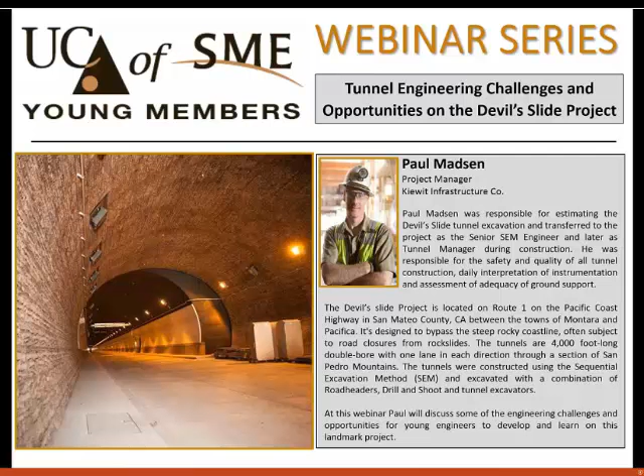Paul has over 25 years of experience as an engineer, superintendent, and manager for estimating, planning, and executing EPBM and NATM tunnels in soft ground and rock throughout North America for Kiewit. Paul was responsible for estimating the Devil's Slide tunnel excavation and transferred to the project as the Senior SEM Engineer and later as tunnel manager during construction. He was responsible for the safety and quality of all tunnel construction, daily interpretation of instrumentation, and assessment of adequacy of ground support.

Paul, thank you very much for presenting to us today, and when you're ready, you can please share your screen. All right. Here we go. So now all of you should see a beautiful slide of the Pacific Coast Highway. I'm very happy to be here and have this opportunity to talk to the future of our industry here today. And I have found out, however, there are some people who are over the legal age for attending a Young Engineers WebEx. So I'm also talking to the past of the industry, which is just a great privilege. So I hope you're all having a good hump day here. Wednesday, it's all downhill from here.

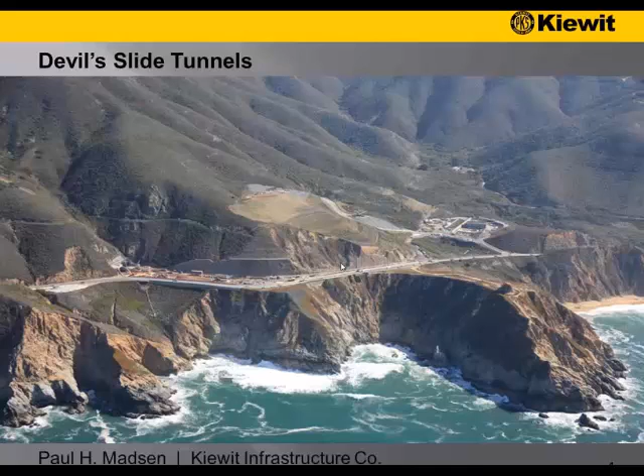So this was our construction site on the Devil's Slide project, and it's a beautiful location there in California. The south portal of the project is what we see here. Here are just some facts, and I'm not going to dwell on these too much, but what I want to point out on this slide is the purpose of this project. The purpose was to bypass this section of Highway 1. It looks similar to the previous slide, but it's just north of the previous location, right where the road runs along the steep edge and the cliffs. This is where Highway 1 has occasionally slid into the ocean over the years, and the project was to bypass this section.

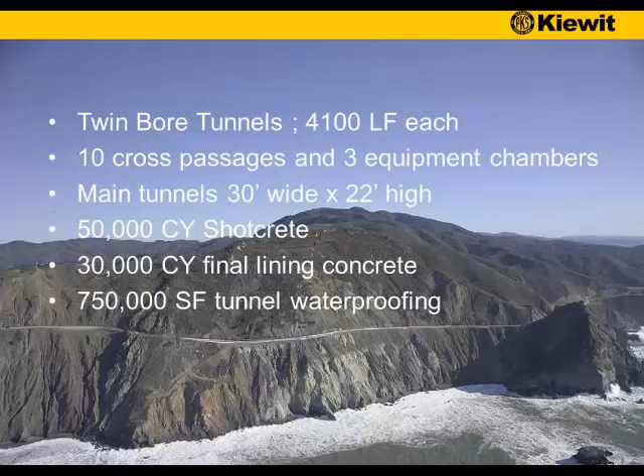Another thing to point out was the amount of shotcrete on this project, with 50,000 cubic yards of fiber reinforced shotcrete. That's a large amount, and I think it's one of the projects in North America with the most shotcrete on it. I know this is a bit of a tacky old slide, but it does serve the purpose of pointing out the features of the project.

The alignment of the tunnel, as you can see, is a straight line. It's two bores, 30-foot diameter each, with 10 cross passages along the way, and it runs from the upper left-hand side of the slide down to the lower right-hand side where the south portal is located. Part of our project was also this operations and maintenance center, which is located a little south of the project.

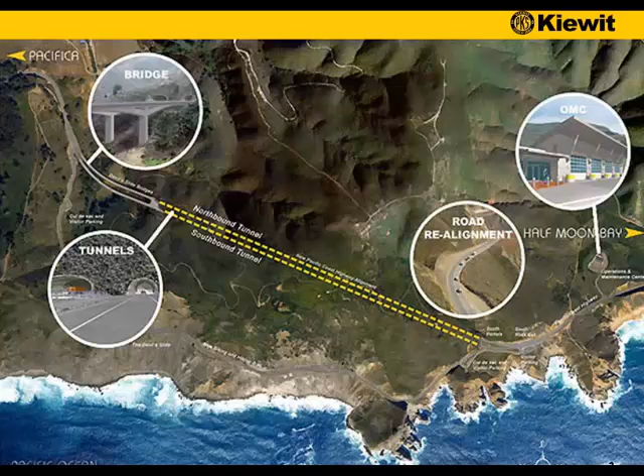Now here, one of my pet peeves, I'll start with that, which was geology on the job. This project ran through 3 major formations: a granodiorite, sandstone, and then a siltstone in the north end. As an engineer, when we first start looking at this, this is what you dig your teeth into, to understand as much of the geology as is available to you. And you can see we have some interesting features on this project.

You have a relatively high overburden for North America, I should say. If you're mining in the Alps, this is nothing, but for us to have 1,000 feet of rock over us is quite a bit. We see there are some fault zones between the main geological features, which could create some challenges in excavating the tunnel. The north block was completely jointed and fractured, almost soil-like conditions, whereas in the central block we had some very hard rock.

And another interesting thing here, if you look at it from a hydrological standpoint, if you see the blue lines, the water tables, how they're staggered across the alignment, and you see how when we mine from the south going to the north, we will go through a fault zone where there will be an instantaneous increase in the waterhead.

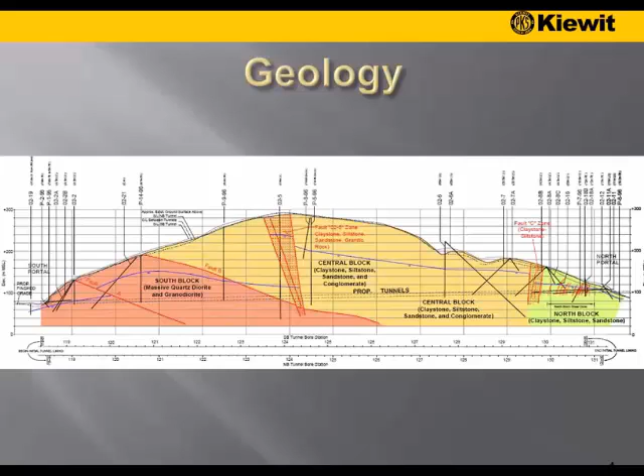Now the way we excavated and supported this tunnel was by the use of the sequential excavation method. It's a tunneling approach that has many names around the world. You'll hear it called the New Austrian tunneling method, mostly in Europe, especially in Central Europe, continental Europe. SEM, that's what we call it here in North America. Sprayed concrete lining, that's what the Brits typically call it. And there are several other names you will see it referred to as when you read literature from around the world.

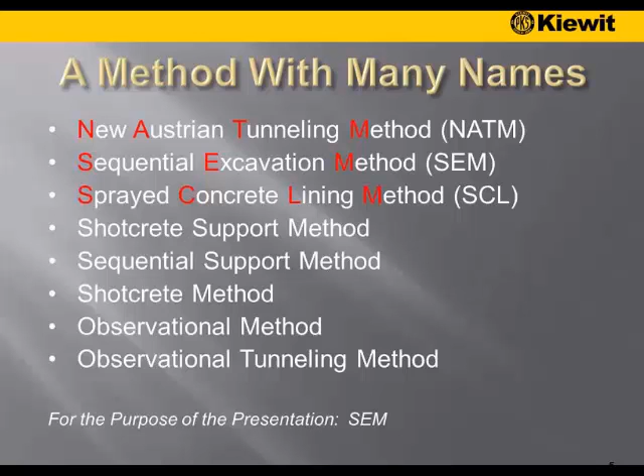One I personally like the best is really the observational method, and we'll get right into that here. But for the purpose of the presentation, I'll call it SEM. The reason why I like the observational method is the SEM process is all predicated on the ground support being selected to work with different ground conditions. You're taking advantage of the strength of the ground that you're excavating through to support itself.

Many of you will have probably seen pictures or movies from old tunnels where you see big heavy timber and steel support that were designed to carry like half a mountain above it. In those days, the engineers really designed that support to carry the dead weight of the rock above the tunnel. But the SEM is a lot more economical, because in that process we just help the ground support itself.

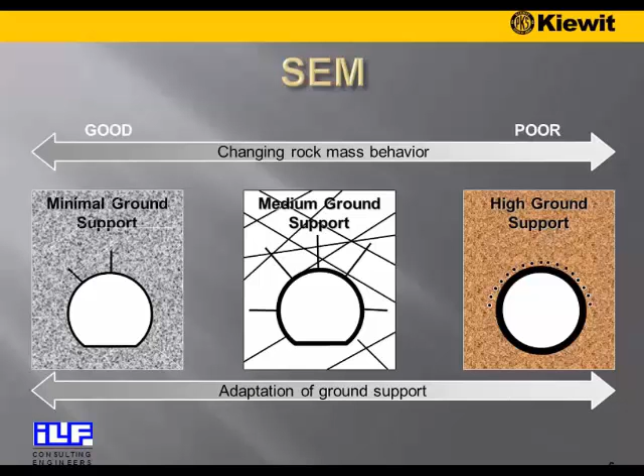And on the Devil's Slide project we had 5 major ground support types, and I'm not going to get into any details on these. I just want to show you guys what a typical tunnel ground support looks like. Here this is for the good rock. You can see the tunnel has a flat bottom. We're not relying on any kind of ring closure. It's got fiber reinforced shotcrete, just 100 millimeters, and then some rock dowels.

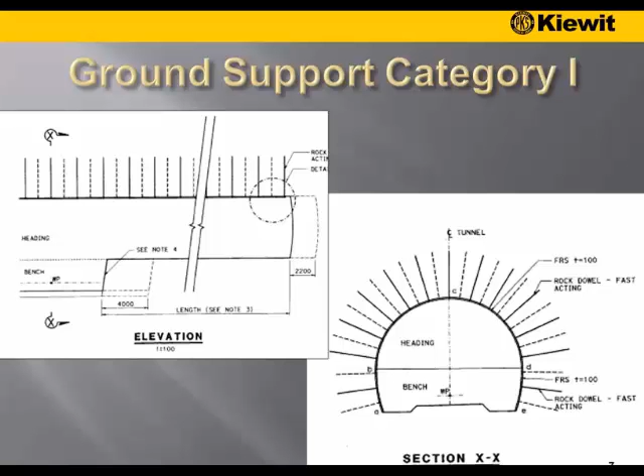And then as we go through these categories, see how we get more stuff showing up on these drawings. It gets completely crazy here when we get to category 5, which is what we used actually in the north end of the job in the normal soil-like conditions. Here you have a closed invert, you have a closed ring, you have 300 millimeters of shotcrete, all kinds of bolts and spiles and canopy pipes and face dowels. You'll also notice that the excavation round length is here just only 1 meter per round.

But this thing here starts all the way in the estimating stage, and we will sit with a whole group of us, including many young engineers, and we'll have to analyze these different ground support types and take off the quantities. So if you're a young engineer with a contractor and you're in the office, this could be one of the things that you get confronted with, that you get this slapped on your table, and somebody goes, here, now I want you to take off all these quantities. So you have to take off the different types of rock bolts, the shotcrete, the excavation volumes for the different excavation lifts for each round, so that you later on can do cycle analysis for the excavation.

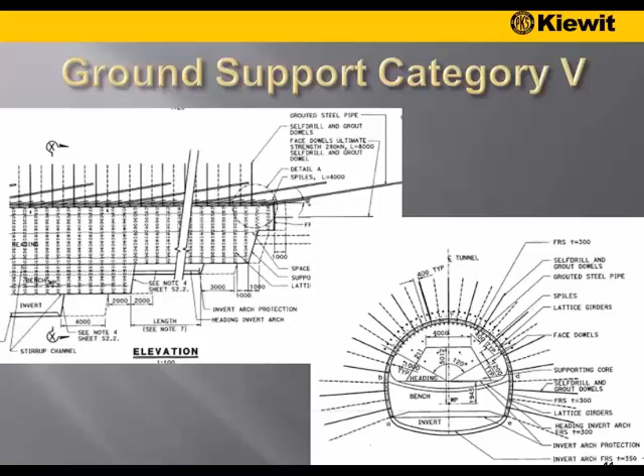So now that we've got the job and we're out there building it and everybody is excited, we have to select what ground type to use. This here looks like a crazy octopus, but it's how do we decide what ground support type to put in? Well, we gather information through doing probe drilling, collecting groundwater data, mapping the rock, everything that we see in here, MPBX, that's multiple point borehole extensometers. So here our engineering staff will get involved in collecting all this. We will have engineers collecting information from probe drilling.

We'll do the laser scanning, which was a new technology at the time when we did this project. And once we gather all this information, the convergence survey, we will have engineers analyzing the convergence, so the deformation of the tunnel, how much the tunnel will deform, and then put it all together in a big pot and make a decision of what type of ground support we need to implement for our next couple of rounds.

We would meet with the owner on a daily basis and go over our observations and make sure that they were on board with the decisions that we were making. It's an interactive process on a project like this. It's not something you sit and go and do in a room by yourself. A lot of people take part in collecting and analyzing this data on a daily basis, and that's not something you can learn in school.

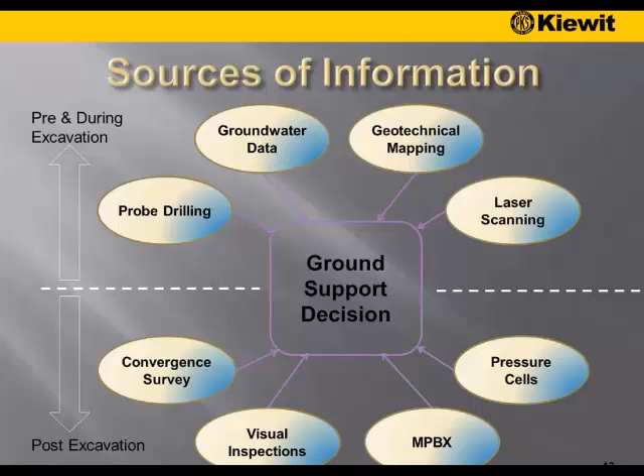You know, I feel really happy for the young guys who were out there that I was working with on this project, who were able to get exposed to this process and see it and be part of it, because it's a huge resume builder for your future career if you have an opportunity like this to be involved with it. We have a question.

Did you grout any zones to limit the groundwater inflow? No, we didn't grout. But what we actually did was we drilled out ahead to drain or lower the hydrostatic head to eliminate any issues with mining right into that high water pressure we saw there when we went from one formation to the next.

So together with Caltrans and the construction manager on the project, we agreed to do several long horizontal holes from the north end of the tunnel, where we drilled through these formations and we lowered the hydrostatic head. So when we got to these formations, we had drained the water, and frankly we never had any issues with any kind of groundwater inflows, apart from minor inflows along the tunnel while we excavated it. So grouting wasn't necessary. It could have been used, but it ended up not having to be used.

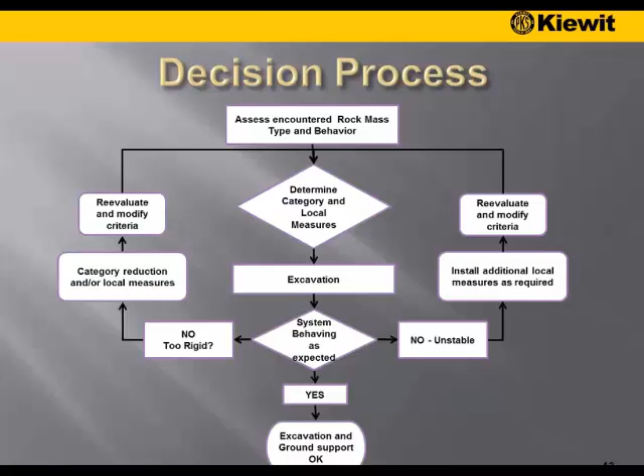And this flow chart here is not something you all have to remember, but it just shows this whole process on how the information feeds back into itself, and you use the information that you learn along the excavation to adjust and make the support better. And now here's some more exciting pictures. Now we looked enough at all the text slides, so let's look at some. This is more the meat and potatoes of the game right here.

This is one of our big AM105 roadheaders. That's what we used to excavate most of our tunnel with. It's a 125 metric ton beast from Austria. And the field engineers who worked in the headings, I think they're probably the ones that had the coolest job on the project. They would get to ride shotgun on this thing here, and their duties included working with the guidance system for the machine here. So the machine has a guidance system that you use so that you can control your excavation profile.

They'll be part of, of course, mapping the geology as we were tunneling through it, and doing checks on setting the lattice girders. We can see the lattice girders there, that they're exposed until the second pass of shotcrete gets applied. So they were intimately involved with all steps of the operations, and they worked very closely with the heading crew. The heading crew depended on those guys, and it was great to witness the guys get the experience that they did on this project here.

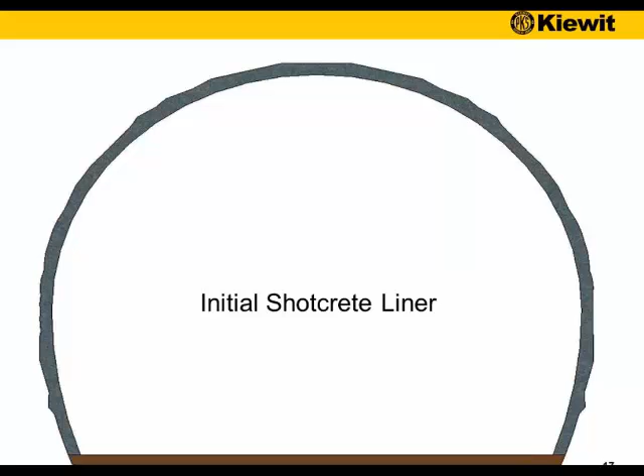Once the initial shotcrete liner is in, the excavation is done. Now, all this other work that many of us tend to forget about comes afterwards. These are all the components of the final lining that gets installed in this tunnel once it's excavated. If we start from the bottom there, you can see these abutments down in the bottom. Those are the foundations for the arch.

We have walkways, and we also have the whole final arch structure with all the different conduits and embedded boxes and whatnot. Walkways with conduits in it, precast roadway drainage. And to install all of this is very engineering intensive. We have engineers involved with all the different phases of this work.

Last one I'll talk about later, you see the metal panels. It says the metal panels there. That was a big learning experience. It's an architectural feature that we had to install, and something that we typically don't deal with very much.

So, and Jackie, you just interrupt me if there are any questions that pop up. I was just about to do so.

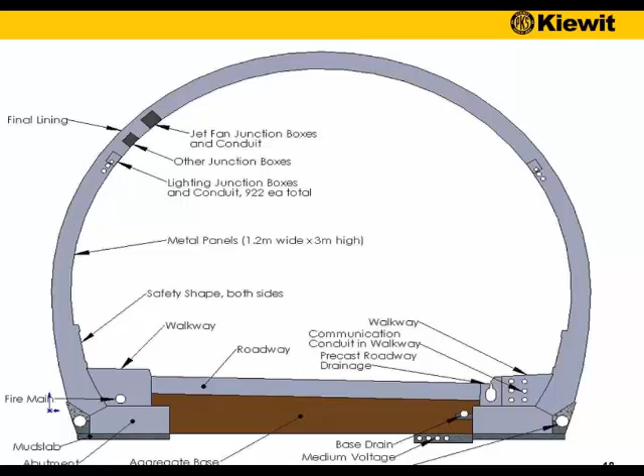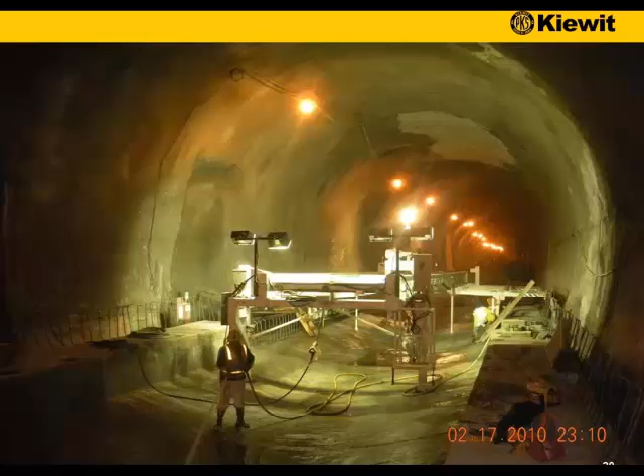So then we just go through some of the final lining work here, or the steps of the operations in the final lining with placing abutments. And here we see the abutments. We also see a closed invert section. So this is in a category 5, where we closed the final lining in the bottom and created a full ring. This is our formwork for that, also nicknamed the Millennium Falcon. This is the waterproofing, which was installed by a subcontractor.

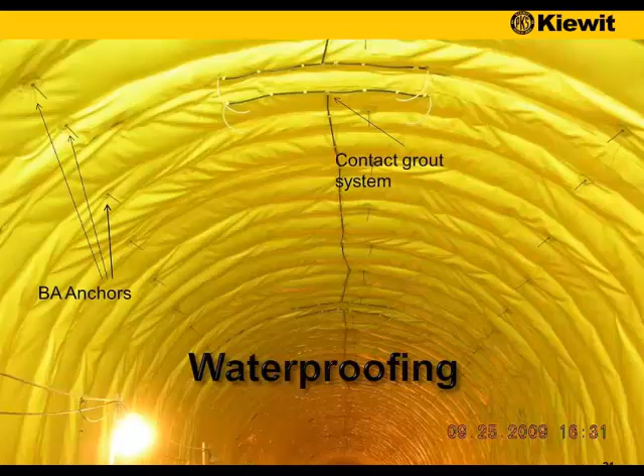So all these steps are very engineering intensive, and they actually took place while we were also excavating, which made a big challenge. So we had a huge staff here at this point in time, because we had guys working on excavation on 3 shifts, engineers on that. We had our surveyors, our equipment engineers, electrical engineers. We had guys planning upcoming finishing work, and guys involved with the concrete operation and monitoring the subcontractors for the waterproofing, and as we'll see here in a minute, the rebar installation as well.

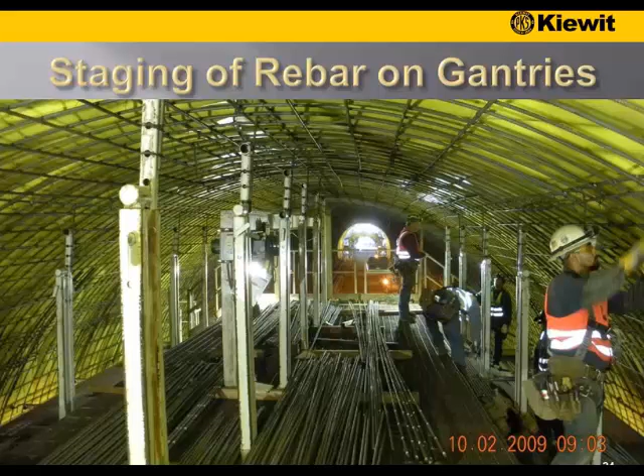These are the rebar gantries from which we installed the rebar in the tunnel being assembled, and you can imagine the engineering that goes into planning, sizing, and procuring this type of equipment, all done by engineers, and many of them had never seen or heard about this type of work before. Rebar itself was a big deal in the project. Rebar sub here. 2 layers of rebar. And here we see all that spaghetti rebar.

We also see all the components of the final lining here. Really, you start from the top with all the rebar. See all the lights there. You're wondering what in the world do we need all those lights for? Well, that was because the inside of the tunnel was stained black. So when the tunnel is stained black, to get the amount of lumens you need for illumination inside the tunnel, you need a bunch of lights, and that's what you see there.

You see the safety walk, or safety shape, it was called, at the lower part of the arch. This was a form liner that was installed on our arch form, which was the first time we had ever done that. I think it was the first time anybody had ever done a thing like that. And it was stained yellowish. We see the walkway with all the conduits and the precast drain there for the roadway that is to go in later on. All these multiple steps. It was fun to build anyway.

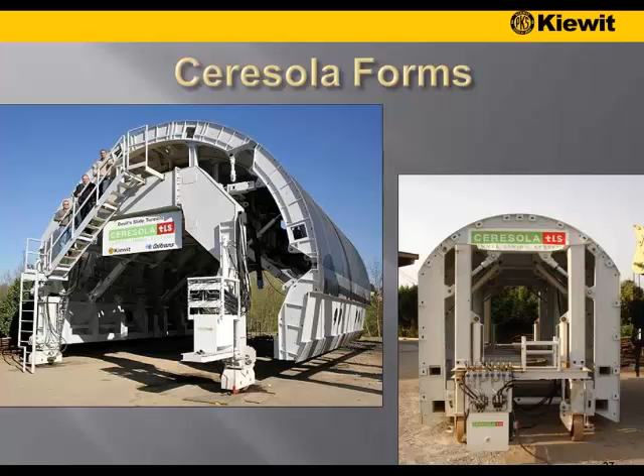Here the formworks, they're built over in Switzerland. So here's where your planning has to get way out ahead of the operation to ensure that you have enough time to engineer, procure, build, ship, and assemble all this formwork here. I think the picture on the left there, that's a load test of the stairs. And here's the form liner that was installed on the outside of the forms to give that texture.

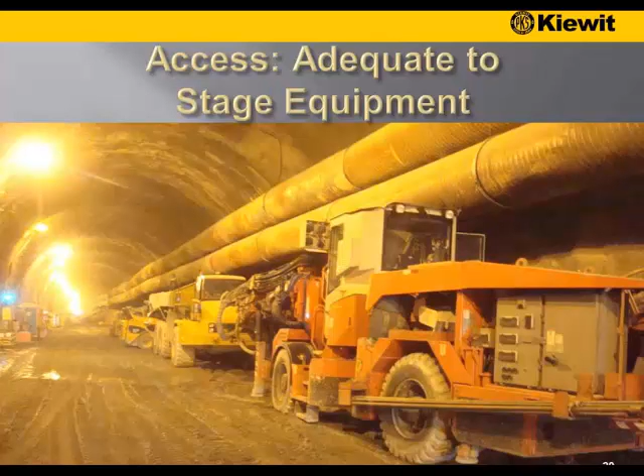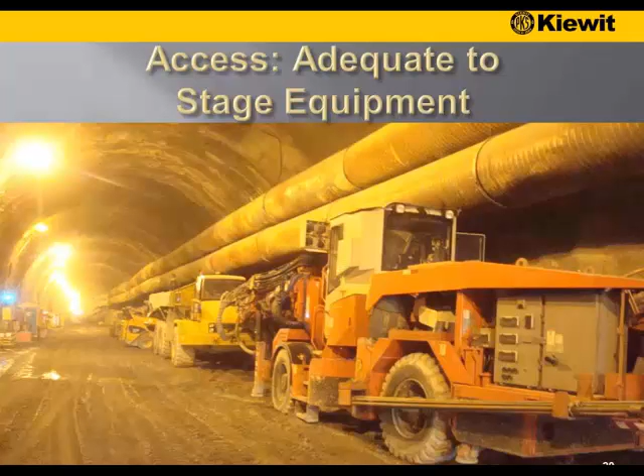And as I mentioned, we were excavating further up the tunnel while all this concrete work was going on. Further back in the tunnel up front, we were still excavating, and we had to park all our equipment and all our stuff up front. So a lot of effort going into keeping track of all the gear and where to park it.

And talking about engineering duties, if you see those 2 ducts running along the tunnel here, the ventilation of this project in itself was a huge deal. And a lot of people learned a lot, whether they wanted to or not, about ventilation schemes and dust collecting along this project, because as you can imagine, when we're closing the final lining further back in the tunnel, we can't have these ducts hanging up there, so we had to come up with some alternative schemes to that.

And here again, just to emphasize the logistical challenges of excavating and concreting on the same project. See, they're trying not to impair each other too much. We have the haul truck on the upper right-hand side, the haul truck running in and out of the tunnel while a crew is trying to place abutments at the same time. One of the haul trucks actually is backed into a cross passage, as you can see there, just to get out of the way, because we need to haul the muck as fast as we can, so excavate as fast as we can. The excavation was, of course, in the critical path here.

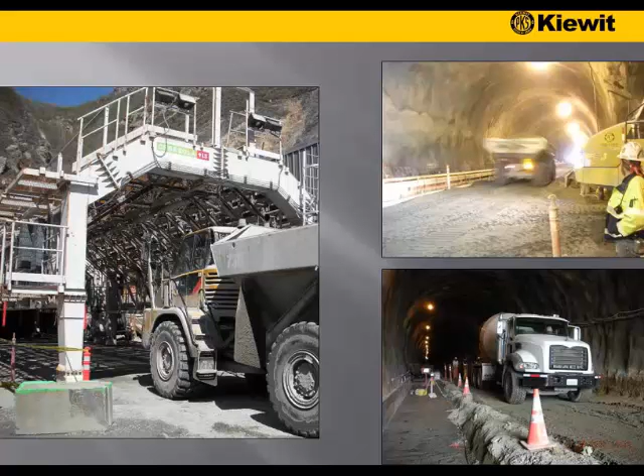And we made some of these guys like a foreman or superintendent for that operation, so they got some hands-on experience with running the crews and supervising crews, and they were responsible for the safety of the crews. Really a great opportunity on a project like this, something that everybody should take advantage of if they get on a project like this. And now we're getting close to the end, and I just want to show some of these more fancy pictures from the project.

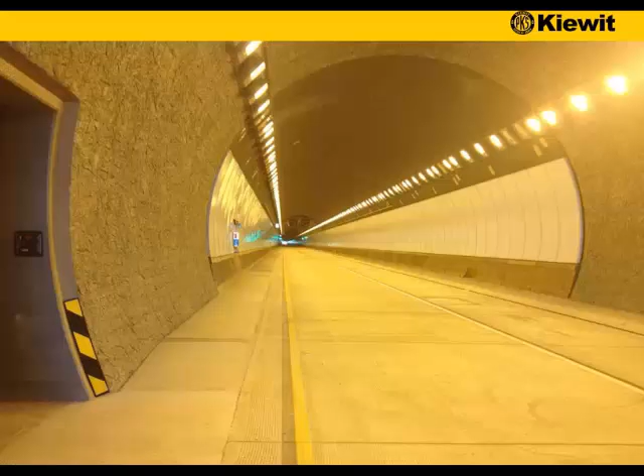And then it was all hand painted, you can see here. So it's a beautiful piece of work if you go out and see it. I hope Caltrans is taking good care of it out there. And this beautiful slide here is what the final tunnel looks like. You can see this is a different texture right here on both sides of the tunnel with a roadway in, and here these metal panels I mentioned earlier, which ended up to be a real success story because they're not used much in North America, and we couldn't find anybody who really had the expertise to do this work.

So we identified that early on, and we had some of the young engineers. Again, it didn't matter if you were young or old, experienced or inexperienced, because nobody had ever seen it before. But we got into it very early on and did a lot of research. Got our foremen and superintendents or structural guys or carpenters involved and looked at the systems for installing these and planned it down to the nth degree really. And when we went out and executed it, we executed it without any safety incidents, perfect quality, and made a pretty penny on it as well. So that was a real success story right there.

So by now you should know a few basics about SEM tunneling, and you'll have an idea about what to expect as a young engineer on an SEM project like this.